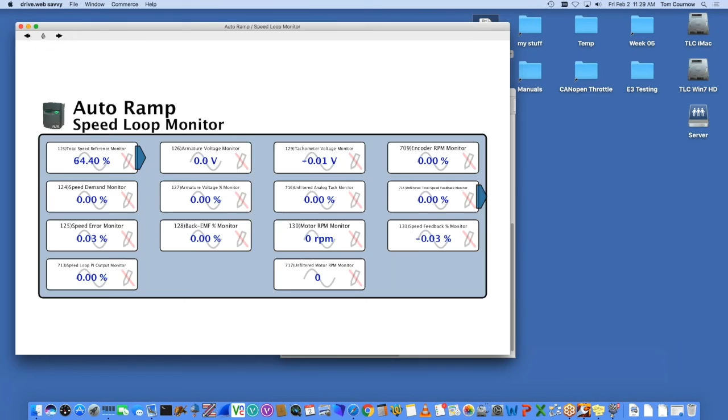So we'll go back to the device directory and look at a couple more things in here. Now, if I wanted to make a backup copy of this entire project, there's a way to back up anything that's in your device directory for editing or just to take with you as a backup copy.

Under the directory menu, there's a command called export data. What pops up when you select that is anything that's in your device directory. You see we got our 6 devices, and they're all checked to be exported by default. So I'm just going to put them onto my desktop here.

I'll just call this my first system, and I'll export all 6 of these real quickly to my desktop. Now you see this file that I created right here. That's actually the file I just created, an XML file that has all the programming and all those devices that you would need to replicate them if you had to replace some hardware.

Now it's also something that can be used to edit your project in the hotel room or in your office. Once you've got that file in hand, from either Phantoms or from the hardware itself, there's a command under the directory menu that we can import. I've got to turn off automatic setup so that it doesn't pop in unintended.

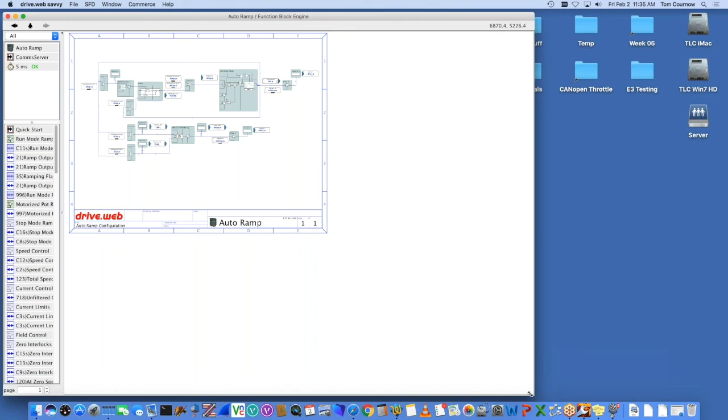Okay, good. So what I'm going to do now is dive inside one of these devices. Let's go inside this drive by clicking on it, and talk a little bit about SFD now.

Now the SFD program - when you aren't using SFD, you'll see this kind of presentation of the DC drive. It's got every parameter in the drive. This is for if your customer doesn't need design capabilities and just wants to monitor his drive - the free software will do everything he needs to support his hardware.

The SFD upgrade is designed for integrators and people who may want to modify their system. It provides a graphical interface to the design that you can use to generate a set of prints for your actual program, as well as to diagnose the program by following the block diagram live while you're online with the module.

Now, if you have the SFD option, when you put this into your drive, let me show you something like this DC drive we're looking at. If we go back to the home page and just look at the Speedies, let's look at one piece of hardware.

So in this DC drive, there's a Speedy just like you see down here. I'm going to lasso it out. This is the board that gets added to the DC drive to make it drive web ready - it's called the DW221 Speedy. Now that board, once it's fitted - let me erase that and we'll go back to pointer mode.

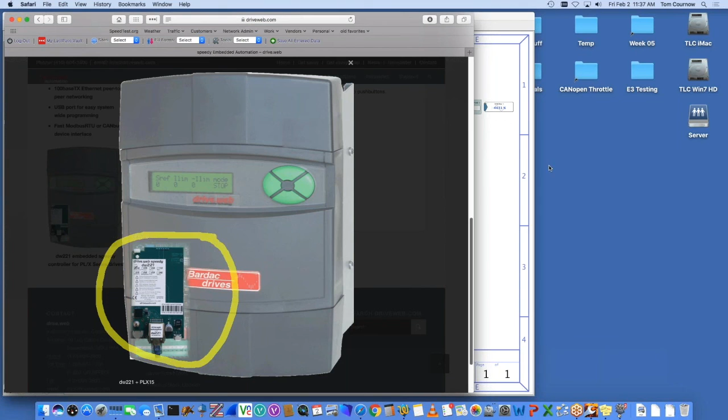Once you've fit the DriveWeb board into the drive, see this little divider I'm moving on the left-hand side? Everything below this divider is built into the drive firmware. You don't need to worry about that - if you bought the drive, it's in there.

Now, when you put the Speedy into the drive, it adds a new library of function blocks that you can add to the drive's block diagram. So it allows you to customize, even in a drive, what the solution is for what you're trying to accomplish.

Now, if you go into the Smarty or the Speedy hardware, those are completely configurable. So this library of function blocks that you'll see pop up when you're trying to place objects later - all those function blocks are based on what you purchase as far as the software goes.

So when you go to our catalog and figure out what you want to do, hopefully it'll be straightforward, but with our help if need be, you can actually get all kinds of different things to solve pretty much any kind of solution, any kind of problem in the industrial world.

Sorry, I've got to get a drink of water. I've been talking too much.

So this little divider is important in that it tells you where the blocks reside. It's not really important in the big scheme of things, other than that if you were to pull that board out - if you stay native to the drive, everything would be below that line. Anything that you put into the board will be above this line. And that board actually has this drawing stored in it.

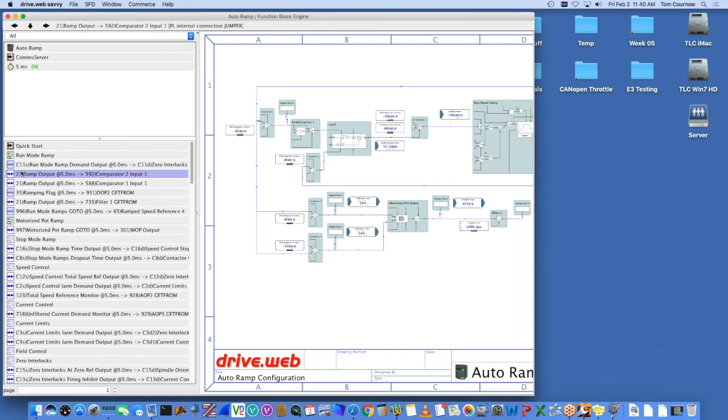You see some of them have white backgrounds and some have blue backgrounds. If they have white backgrounds, they're already in your drawing. So you see this ramp output - let me drag it over so you can see the whole connection. So the ramp output to comparator 2, that's associated with this on the left-hand side. That's coming back - this line here that we see has input 1.

If we right-click and remove from graphic that connection, you see it goes to a blue background. When I drag it back in, it's actually brought back into the drawing, and now it goes back to the white background. Same for the function blocks.

The function blocks that have a light blue background, like the stop mode ramp, are not in the drawing, and when you take them back out, they'll go back to the light blue background. So anything that has a dark green tinge to it is in your drawing.

Now in the DC drive, there are blocks that can be turned off, and they have this red X on them. So if you were to bring in this summer block, if you see it's red like that, it means it's not activated. Now you can drag things in the DC world to hook something up to them - there's nothing hooked up to this one. So what I'll do is drag it in, and when I connect it up to something, it activates the block.

It's sort of peculiar to the DC drive, but that's a legacy thing because this feature existed before DriveWeb was actually made. The drive's about 17 years old now, as far as the vintage of the drive. If we delete that connection, it deactivates the block, and when we remove it, it's back out of our drawing.

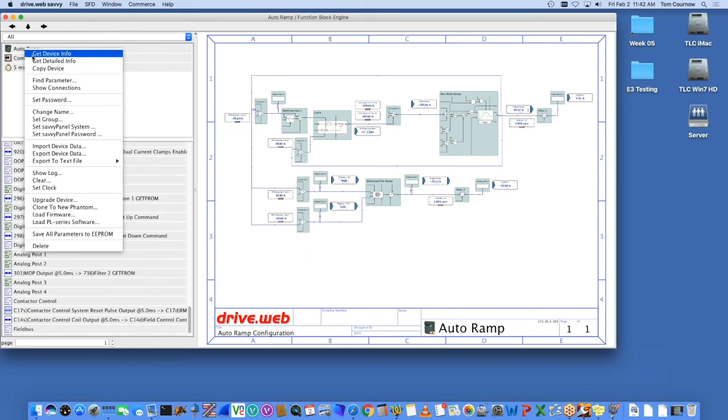These capabilities that you see here, mainly on this window that pops up, are the process control library. I'll put that down here so it'll be in the background. These blocks you see here are included in the option 5 for the DriveWeb hardware, including arithmetic type devices, clamps, comparators, control function blocks, and all kinds of things you can browse at your leisure.

If you go under the add function block, you'll get a browser that shows you options. Let's look at the control block - say we want a PID. There's a block diagram for the PID. When you drop these blocks in, you'll have the block diagram in your library. If I hit OK now, there's my PID function block.

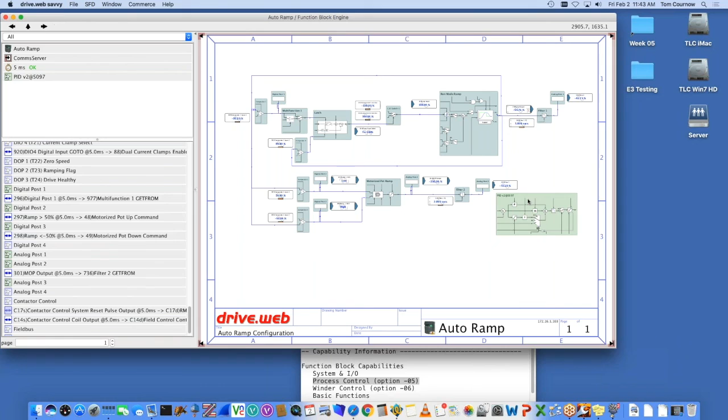Now you notice that went up to the top part on the left-hand side, which means it's on the board. As a user, you don't really care because you're just going to draw lines to connect things. So say I wanted this analog post connected to here, you just draw a line. But in the big scheme of things, the architecture is a little different in the background, so the slight difference in color just tells you where the platform is, sort of like the break over on the side here.

Delete the connection and delete the function block, and you see it goes out of the list. So you can play with those filters any way you like - you can only show function blocks, you can show unplaced but active, you can do all these different things depending on what you're looking for.

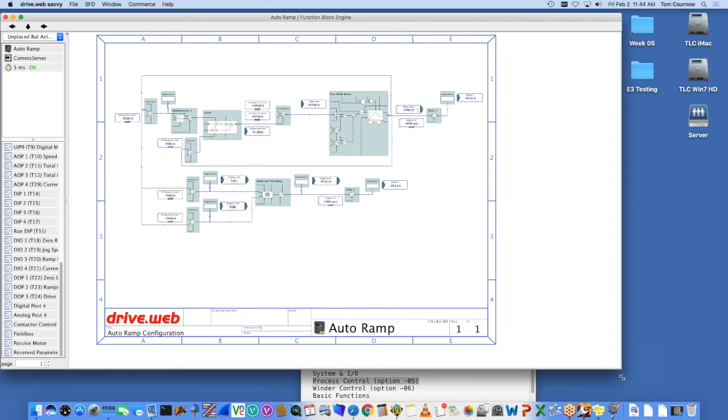I'm going to hit the home key back for the home view - again, the H key for home. You use it in the drawing page as well as anywhere else.

Now the drawing page that you create, you have a choice under the SFD menu to set the border to different sizes. So say I wanted 11 by 17, I can go under set border and say make it ANSI B landscape, which is a standard size. Then I hit the home key, and now that's the aspect ratio if I have a printer that'll do 11 by 17 prints. You also have some European standards - the ISO, international standards - for the A4 and A3 levels, as well as some custom forms based on different contributions along the way.

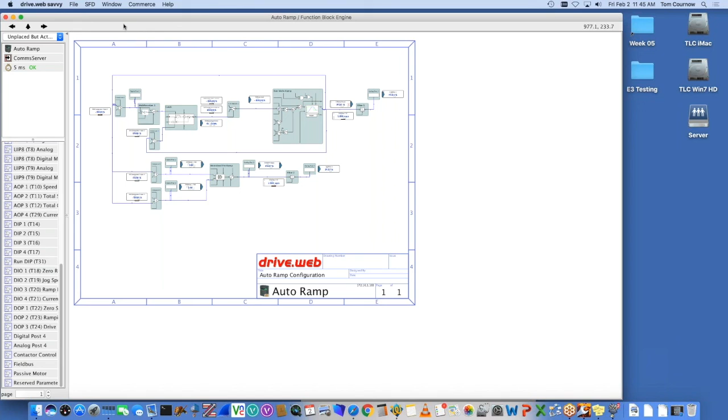I generally like these ones with the alternative title box because it gives you the most area to work with. If you go back to some of the earlier ones and choose them, you see the page, you get a corner of the page, and it doesn't make it as easy to lay your blocks out and do the drawing. So I've changed over to the default as my ANSI A landscape mode.

Hit the home key again. So these zones you see here around the perimeter, like 1 through 4 and A through E, are ways to locate where the blocks are when you start doing multi-page kind of things and breaks in your connections. Now when you pick up a function block or place one, let's just place a new one - we'll put in a PID block.

So I'm going to go into the control menu and put in a PID. There's ways to - I'm going to zoom out from the title form. There's a lasso command, you see how this is all yellow, and when I let go of that, that selects everything that was inside my window. These can be moved as a group.

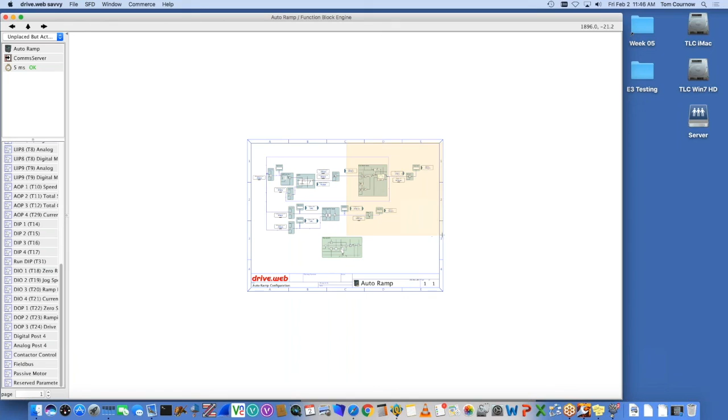Or you can do a subset of that - if you only wanted to do a part of it, you can move only some of them. Now what I'm going to do is if we go back to the home view, while these are selected, you can see the corners, there's a little sepia tone square around the whole edges. And if I hover over this arrow in the upper right hand corner, I can actually increment by a page and drop these things all on a second page.

Let me bring out some things here to show you how the forms work. So if I zoom in here, it broke the connections, but it points back to where those connections go to - page 1, zone A2. I could go to page 1 and go to zone A2, so that's a connection right there, here's A2 down here. But I can also use these as navigation paths, so if I want to go back to the other end of this connection, I just click on it and it pops back to the other page.

Okay, so you can go navigating around these links. It does all this referencing for you dynamically as you break connections if you choose to. Now I can move this all back as a group to the first page. It'll deallocate the page. I hover over the upper left-hand corner, and you now see it reproduced all the connections back to my drawing.

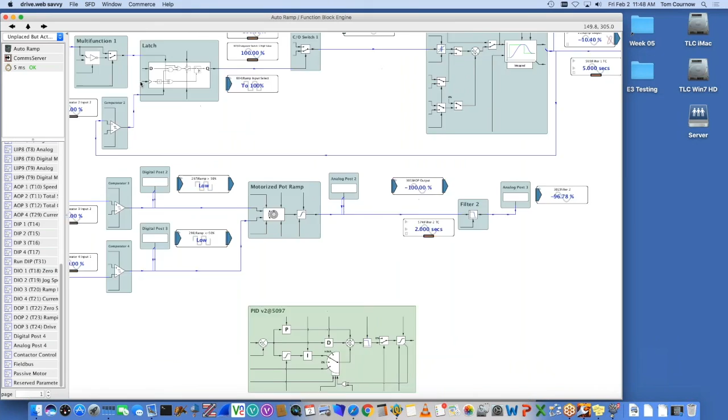Now there's a shift command, or command, I didn't mention when we were at the device directory level. Anywhere you want to zoom, instead of using the plus keys and zooming in and then panning around to where you want to go, there's a couple of different shortcuts to actually zoom in on what you want. If you right click and say start zoom marquee in any white space, that'll start a window that'll let you zoom in to whatever you select, and then the next time you click, it'll zoom into that window.

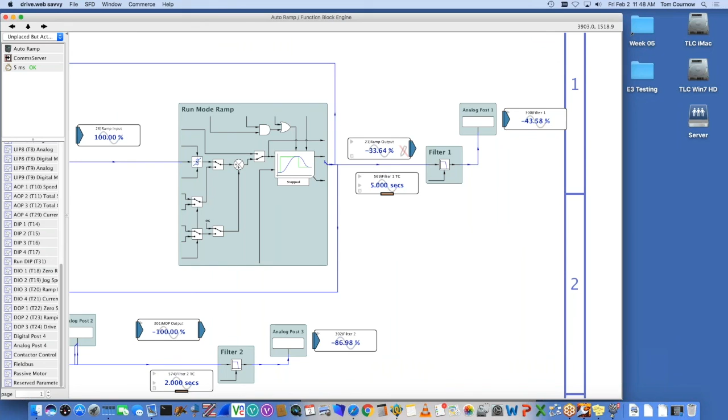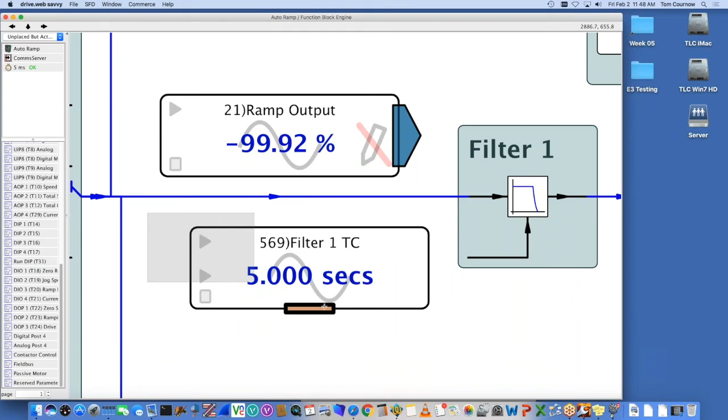Now that works fine for the average Joe, but you want to be a power user. The key is hold the shift key down and just click and drag. Then you can zoom in really quickly exactly where you want to be. I was just holding the shift while I click, and when I let go of my mouse, that's where it zooms to. So shift, click, and drag, I'll try to announce it when I'm using it so it's not magic.

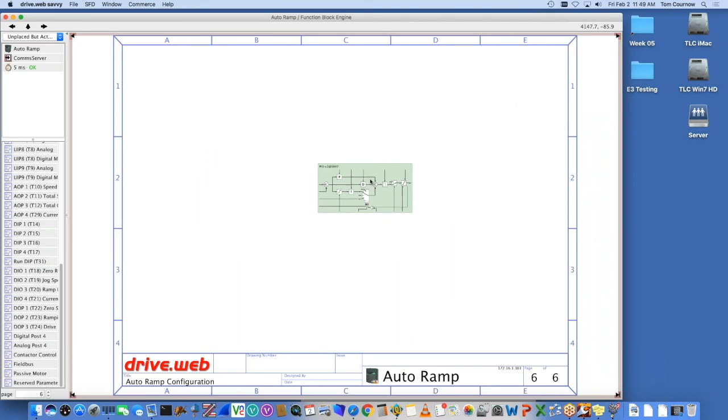Now when you're picking up function blocks, if you go to the lower left-hand corner, it goes to the first page, and when you go to the lower right-hand corner, it goes to the last page. You hover over here about a second, you get a page, and you can see the page incrementing at the bottom. So if I put this on page 6, I've got 6 pages to my drawing now with a bunch of blanks in between. So if I wanted to put these parts on that last page, I go to the lower right-hand corner, it jumps to the last page, and now it's on page 6 with that other block.

There's a lot of pretty sophisticated editing tools built into the software that you can use to make your life easier. I'm going to put everything back on page 1 just by hovering. Now it remakes the connection. And once I drop them, I'll move this other block out of the way.

Okay, any questions, Stuart?

Okay, so let's look at how we make a connection. Now there's a ton of function blocks. It's going to take a little bit of time to figure out which blocks do what. There's a help manual that's built into the software that you can browse at any time.

If you go under the user manual, that'll build a manual, and then from your software you can go browsing into different topics if you choose, or if you want to find out about the run mode ramps, if I do get function block info, up pops the information about this block. And if I do show user manual page, it'll actually jump to the info window that shows how the run mode ramps works.

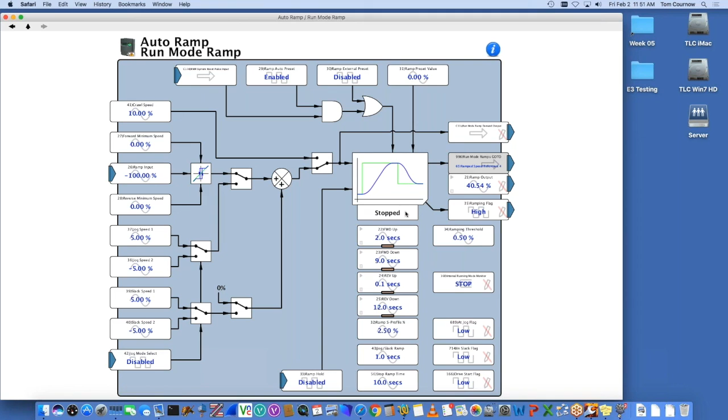So let's look at how you make a connection between any blocks you decide to put into your program. I'm going to create another viewer window so you can see. This window is going to be inside my drive. Okay, so I'm going to create a new viewer.

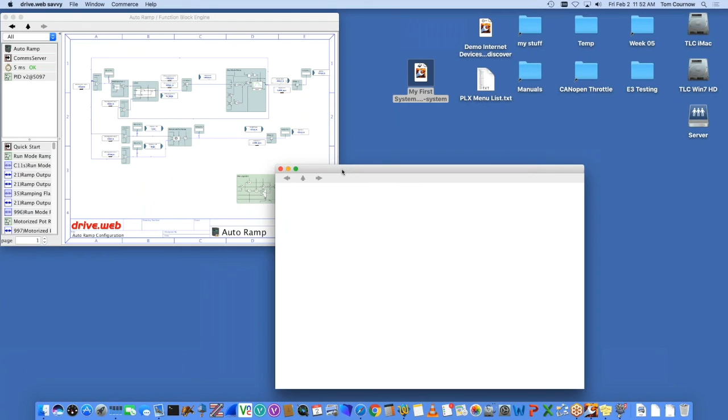Right now it doesn't know what type of window I want, it just created a window. So under the file menu, I can open another device directory, which will be just like the one we go up a level, the same device directory as you see here. But I'm going to stay in the DC drive in this one. I'm just going to change the name of this guy real quick to Tom's smarty. And then we're going to dive into that one on this page, which is an empty Smarty module.

I'm going to drop one function block in there to give me something to hook up to. We'll see all the different ways to make connections. I'll zoom in with shift, click, and drag. So there's a parameter—it's just a little place to make connections to, really, but it's used for a lot of other purposes along the way. Let's see how you make connections.

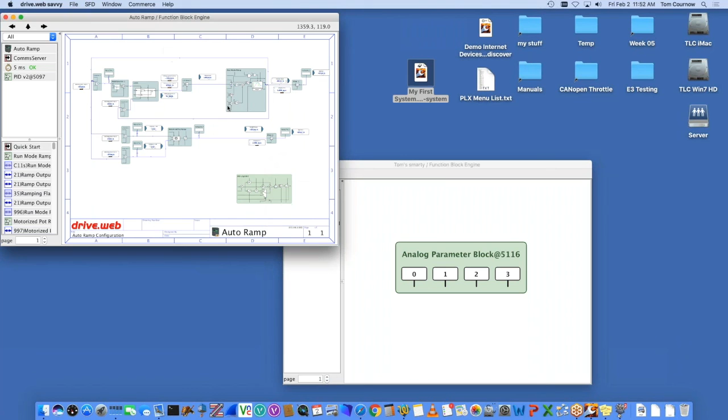The easiest connections are in the same module. I'm going to delete this connection here and zoom in. To make a connection, you see how the little circle pops up? I'll move this over so I can get it all at an extreme level. You see when that little circle appears, that means at the SFD level I can get to the parameter I want to connect to, and I can just drag by clicking. You'll see a dotted blue line, and when you get to where you can make a connection, you see sort of a reverse Pac-Man looking thing. You let go, and that makes the connection for you. That's how simple it is to make connections.

That's the drag and drop method. Now you can do that locally, or you can do it across the network. This one's just a connection from a changeover switch to the ramp input. Say I want to connect this to my Smarty that's over in the other module. Let's see if this is the one that has my analog input in it—it's terminal 16. Yeah, that's got my potentiometer here. So this is my Smarty you see here, okay?

Say I wanted to take this away and connect this analog pot to my DC drive over here. All I've got to do—let's zoom in so you can see what's going on over here. This is a connection across the network using drag and drop. You start a connection on my potentiometer, drag it over to there, okay? Let me bring them out to the top level so you can see them. So there's the ramp input. When I change my pot on my Smarty, it's going across the network from the Smarty over to the drive for its speed reference. That's all there is to it, drag and drop between the two points.

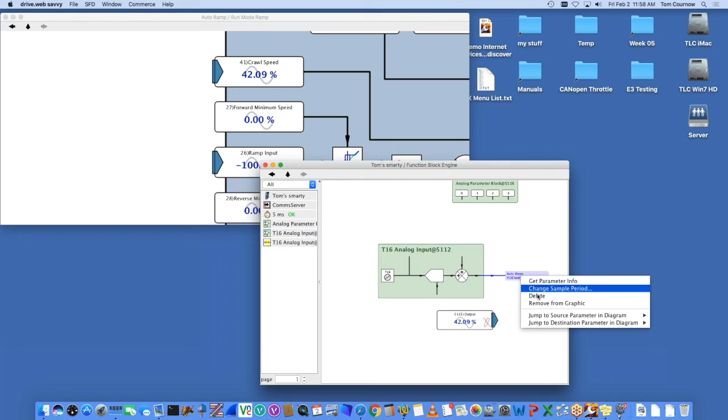It's all up to you which method you use. A lot of people don't like to have a lot of windows open, so they'll choose one versus the other depending on what you're doing. So that's connections, how to make connections either across the network or locally. You just drag and drop between your points and the connections will be present.

Now, before I get into some of the details of configuration, we're about an hour in, so I need to get moving here. We'll just talk about parameters for a second. So all these blue things you see in this program are all parameters. They can be manipulated directly if they don't have an incoming connection, but with this setter, you can change values if you want. You can set them back to the factory defaults.

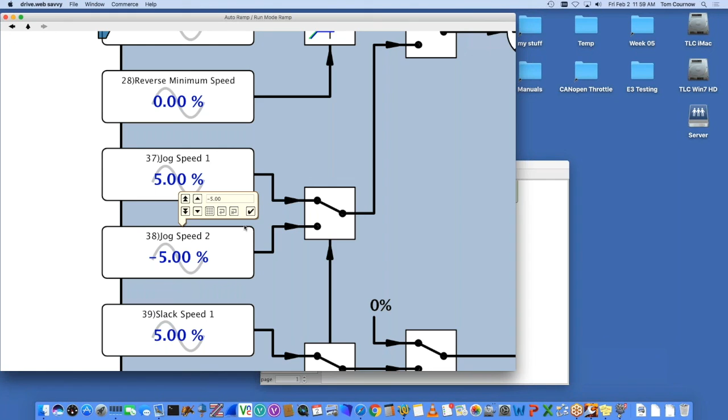Whenever you change a parameter, this little blue or brown bar will show up under a non-default value. It's used for our reporting features as well as a nice visual indicator that somebody's changed that parameter, and you can see them from a distance pretty easily. There's 4 parameters in this function block that have been modified along the way, and it looks like I changed these probably last time I was playing around with them. So they're at some value. I'm going to put these back all at 5 because I didn't reload my program before, and we'll change them later.

So as we look over here to the right-hand side for the ramp output, this is actually a parameter that's changing in my DC drive continuously based on the program I built. It's just a little program that ramps it up and down from full speed positive to full speed negative continuously back and forth, which we'll see why in a few minutes.

Now you see this little AC waveform in the background - that means it's an analog parameter. You see the ramping flag has a square waveform - that's a Boolean parameter. The little pencil with the line through it you see here means they're read-only, which makes sense because the drive's ramp function block takes care of controlling those parameters. So it's a function of the particular module you're in - anything that's read-only is controlled by the hardware.

In this case, all this stuff down in the lower right-hand corner, and pretty much the whole right side, is all set by the drive because this function block resides in the drive. These little blue pentagons are incoming connections. If you go up a level, those are all associated with the blue lines coming into the device or going out of the device. So when you go in, you see I've got the ramp input shown in my drawing. Now there is a connection down here, but...

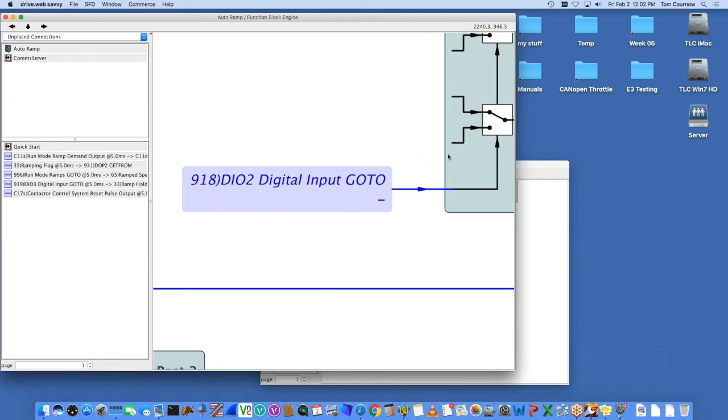If we go to unplaced connections, these are things that are not placed into the drawing. So you can find, if you want to go - this is jog mode select. If I put that in, you see it doesn't tell you where it is because it's not on the drawing, but it tells you where it comes from. That's what these blue pentagons are inside here - they're incoming connections, and these are outgoing connections.

And you can navigate, like I said before, directly by just selecting where your path is. I want to go to, say, the filter - there's the ramp output coming into the filter block. Here's the filtered value, just to show you the filter in the DC drive.

So the analogs have an AC waveform, the digitals or Booleans have a binary waveform. The last type is an enumerated, which we see down here. The enumerated is more than the 2 of a Boolean, but not virtually infinite like an analog signal. So this has a certain number of possible states it can be in that tells us the mode of the drive.

Now if you right click on the parameter and say get parameter info, up pops the parameter info window. So this tells you what the possible states are.

So it depends when you're running a drive in real life. If you were reading parameter 168 on some third-party hardware, the number coming back to you would tell you what mode you're in. So if I see a 6, I'm in slack speed. Now this text is used throughout DriveWeb, but when you get into interfacing, you may need to know all those details.

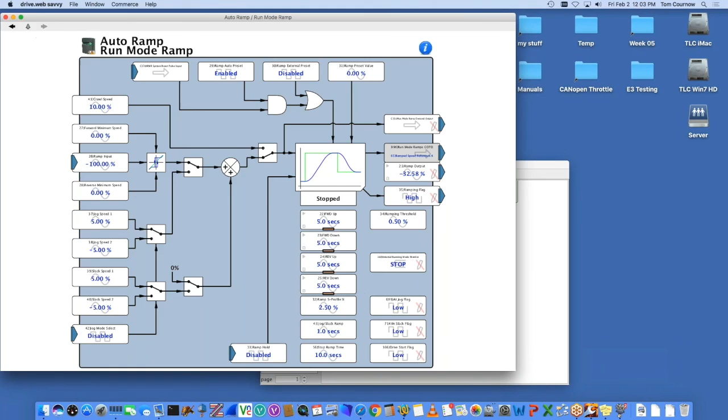So let's go into a commissioning phase here now. We're going to look at how you build screens to look at parameters, then go through the whole process in the last 15 minutes or so. Once you've got your design done, whether it's a standalone device like this drive or a network group as you see in the device directory here, there are some commissioning features we built into the software called docs.

I'm just going to close this window, and we'll go into the file menu and say create a new viewer. Now this window doesn't know what type of window it is, but if I drag a parameter into it, it automatically becomes a doc. You see how it says it's a doc, and I'm monitoring that parameter in that window. Now I can put other things in there by dragging, or I can just right click on parameters. Let's do this one, and since there's a doc open, it just plops it into that doc.

Okay, so we've got the ramp input, we've got the two filters. Let's put this one in there, and then we've got one more here. So here's our five parameters we want to monitor.

Now I can look at the digital values like you see here. I'm going to make it much bigger so you can see what's going on. Let me get them lined up here. Okay, so here's our parameters we're actually monitoring.

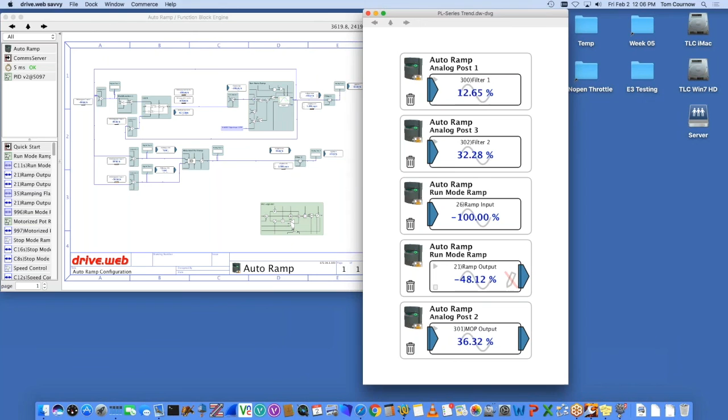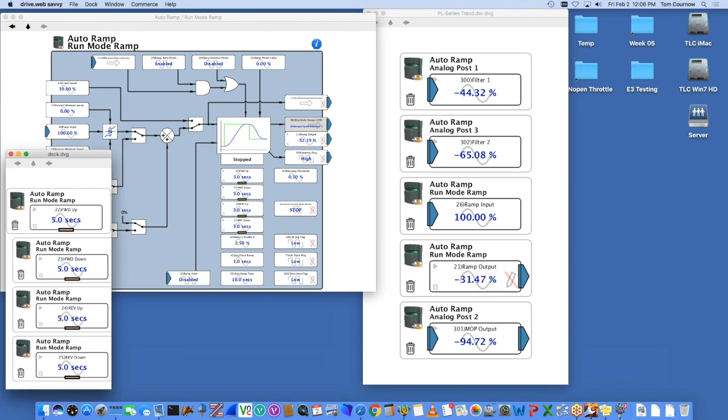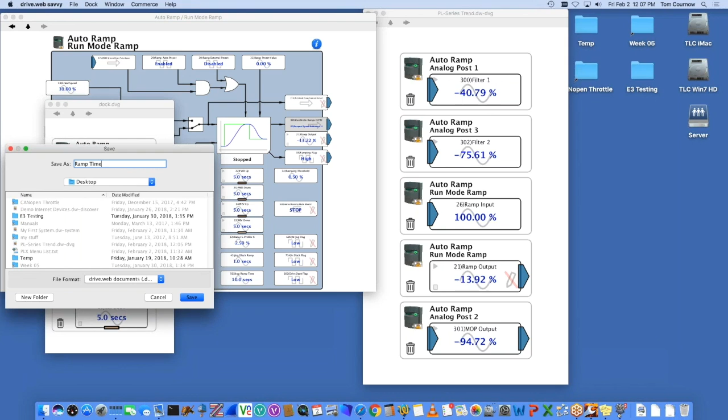If I closed it right now, I'd lose that information because I hadn't saved it yet. It'll squawk at you. But what I'm going to do is save it, and save this one on my desktop and call it my ramp times. So I can close this window back here. Here are my ramp times. We'll just put that in here.

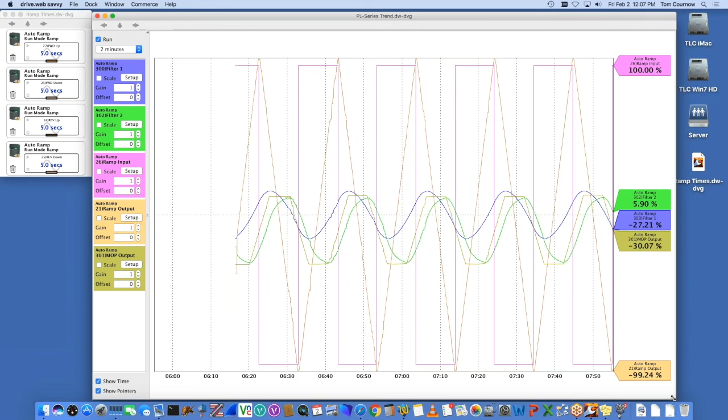And so on this window over here, I can say under the dock menu, show trend. And we actually have over time - let me hit the home key to zoom in at a bigger level. Let me just get as much space as I can, I've got to minimize my little GoToMeeting thing over here. So now that's the trend over time of my parameters that I'm looking at in my drive on my desk.

You can see they change colors based on what's selected, in the order in which I placed them. Now we have controls over here where I can say I want to just see when the value changes. I can reduce the gain on the pink waveform so that when it goes plus or minus 100%, I can move that up here. Then the output waveform, the ramp output, I can make that much smaller. And if we superimpose that by moving it over, you can see it's related to when that other one switches.

It's sort of showing you the design I've got here. And then if we separate these other ones here, these are the filtered - that's the MOP output being clamped, with the top being squared off as you see there. And then the other two are just different filter values depending on what you're looking at.

Okay, they're filtered. You can see the lag that it put into the ramp output based on the filters.

Now I can pause this dock if I uncheck the run command. And now all those navigation features, the shift, click, and drag, I can zoom into and see exactly what was happening at this point in time.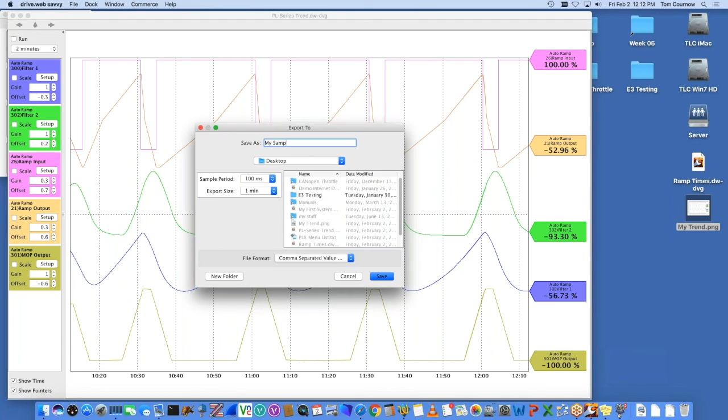I'm going to use a sample because it's a little quicker. Call it my sampled data, and say save.

So now this particular CSV file I can import to another program. After my Excel stops bouncing, we'll see the data actually as it got accumulated every 100 milliseconds. Now the reason it's time-based is because sometimes your spreadsheets and the like, if you give them too much data, they'll just never come back from trying to launch them.

Just want to show you that you can actually look at this data. I'll just make it fit the columns, and then if I go under the chart command and say reproduce the lines, you got my chart.

Now you don't have the controls we have in Savvy for scaling, but you see the raw data is reproduced back into something that I can use and print out or do any analysis on in Excel or whatever program I have that can handle CSV files.

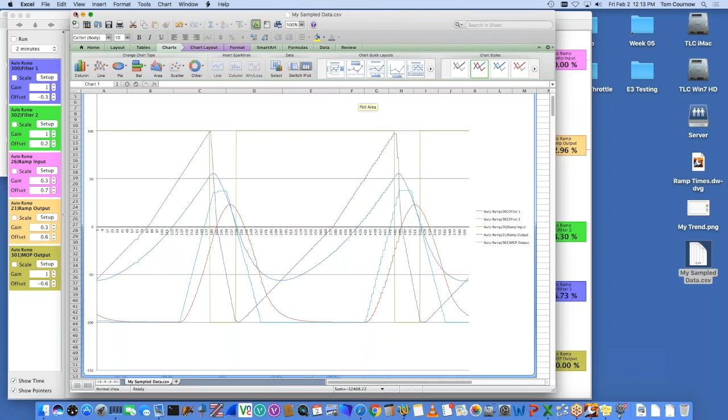Okay. Now we're about 15 minutes out from completing the session. Let me just save this to my desktop.

I don't know where it went, it must have saved it back as a CSV file. But what I wanted to do now is try to tie it all together by doing a quick design

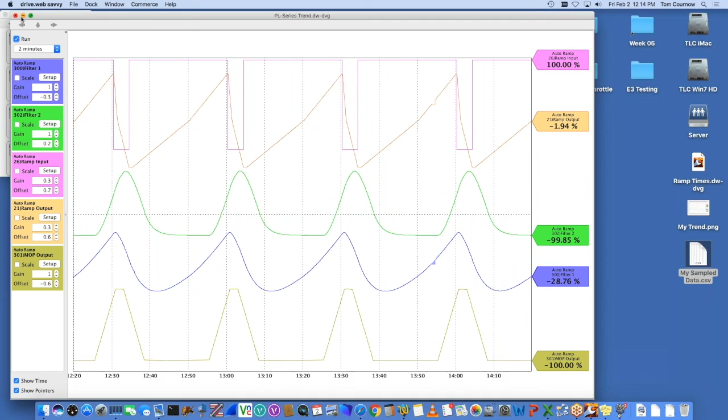and troubleshooting of an entire Smarty. We'll just open up a blank Smarty and go through the whole process. Now I'm going to close this, not worry about saving the changes. Let's open the device directory, and we're going to use Tom's Smarty that you see here.

Now remember this address, it's 1.104. It's 172.16.1.104. Okay, so I'm going to go in like the average guy.

Don't worry about saving that. And I'm going to work offline, being prepared to load it into a Smarty. Say I'm in the middle of the night and I got to replace an old analog rack that did a PID function to get this machine back up and running. Got the Smarty in my toolkit, and I've got enough I/O to do what I need to do to replace that $30,000 rack that is obsolete now and has an 8-week delivery time.

So let's just go from the starting point where, okay, now where do I start? First, I've got to create a phantom of a Smarty that I can use. I'm in the cafeteria drinking coffee while I build this thing before I go out and install it. So I'm going to go under the directory menu and I'm going to create a phantom device.

This is the way phantom devices are - those sepia-toned devices that allow you to do your design work separate from the hardware. So I'm going to create my phantom device, and it walks you through different menus. Now it's a drive web controller, which I know is my Smarty. It's a DW210, just because I've gotten familiar with the product.

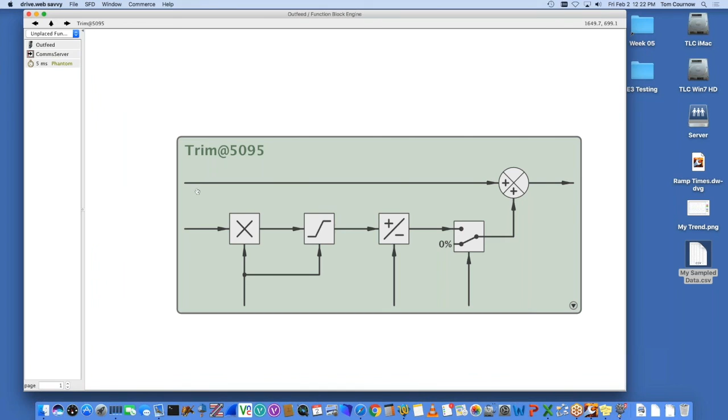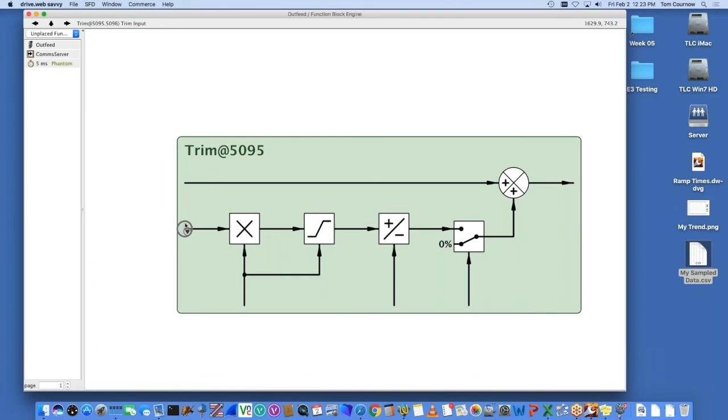And what you see is what you get here. So if you look at that block, I've got the line speed that'll pass straight through, and the summing junction, which I can enable and disable, will allow me to bring another signal in that I'm going to bring in from my PID. So I'm going to hit the home key.

And let's just use a drag and drop connection locally, okay? And we'll connect this one up to here. So right now, with what you see there, I would get my signal over to my outfeed drive section from line speed directly, except I put it in the wrong input.

Should have left that for our own posterity - I meant to put it there. I'll make some mistakes along the way just so we can troubleshoot with our features once we load it in.

And let's put in our PID. Okay, so here's our PID function block. Now we're going to put this into the feedback for the dancer.

Okay, now if you dive in here, it's just what you see - here's the feedback right there, the dancer feedback. The set point's going to be a fixed value, but instead of diving in here and setting it every time, that's something I want at the top level.

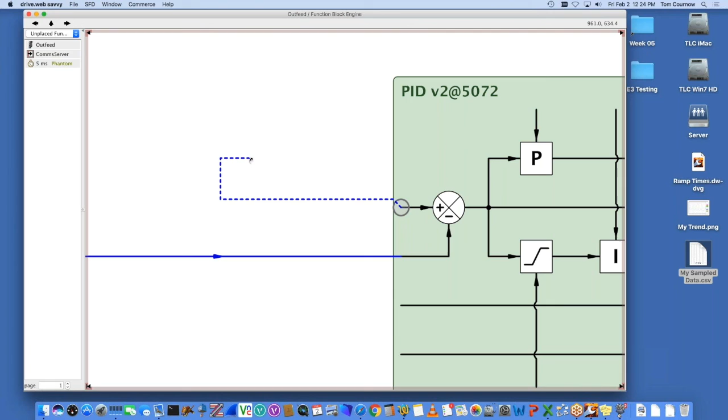So if I shift, click, and drag so I can zoom in - whenever you want to see something at the top level, you pretend you're making a connection, then you hold down the control key and let go of your mouse, and it brings it out to the top level.

Excuse me one second.

Sorry, my throat's getting a little dry.

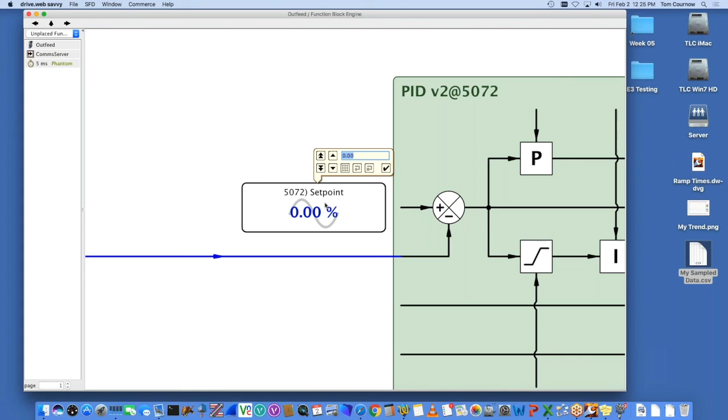So there's our set point. We're going to put that at the 50% position so that the dancer rides in the middle. Back to the home view. Now, this will be our dancer, and this is the set point that we're comparing it to. Then all we got to do is hook our PID block up to here. That'll give us our trim to keep the dancer in the middle based on the speed of the outfeed, to pull it up or let it go down depending on which way you want it to go.

Now, if you hover over any of these lines, it tells me what that is. That's the PID integral enable. This particular one's the integral hold. This one over here is a PID enable, so that's the one I want to take my tension enable into, the PID enable. Okay?

That's sort of the basics. Let's load this in and see if we can get anything working. I'm going to do a couple of things to make our trending a little easier.

I'm going to put a little indicator block in here under the utility command. That'll tell me when the PID is on. This will go green when that switch is on. Okay, now that looks pretty good as a starting point. I'll bring some other things out to the top level by pretending I'm bringing them out to this level. Okay.

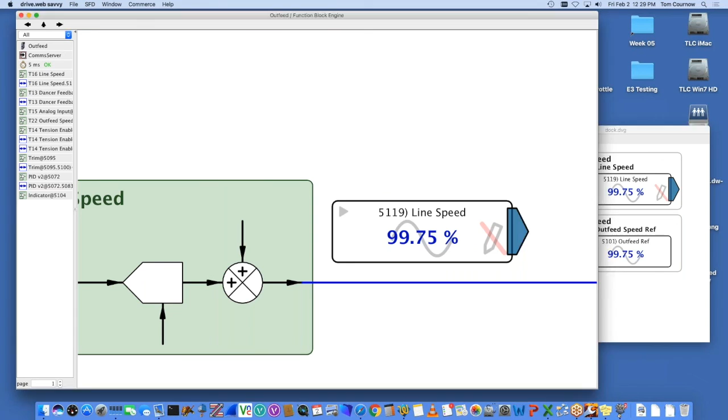So we're going to rename that line speed. Okay, and so if we look at this trend over here, okay, there's our line speed. And we can see if I change speed up and down, let me take the green up because that's line speed. You can see it follows 1 to 1, right?

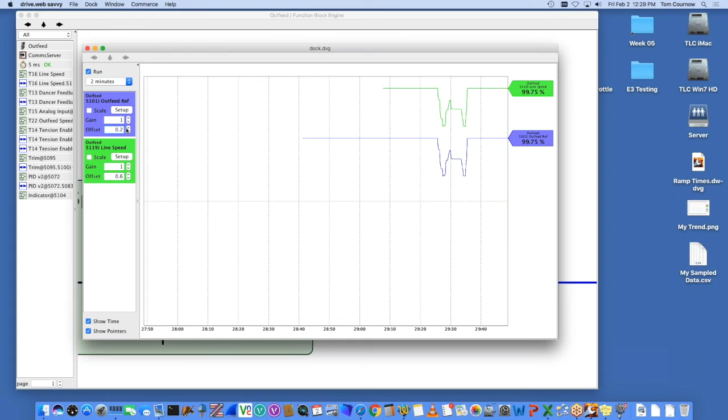So we're halfway home now. Let's make this, move it up a little bit. We'll just move this one up too. We need a little room for some of this other stuff. So now we got the line speed part figured out.

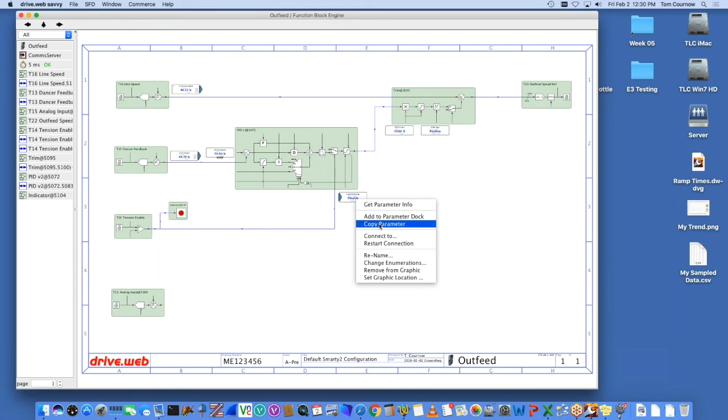So let's see, let's take the tension enable signal. We'll use this one over here, which is PID enable, and we'll just add that to the Parameter Dock. Okay, now I'm going to move, so this is our PID enable. I forgot what input that was on, terminal 14. When I move that value up and down, it's not enabling. I'm moving it, but you can't really see that I'm moving it, but it's not changing state. So let's dive into that function block.

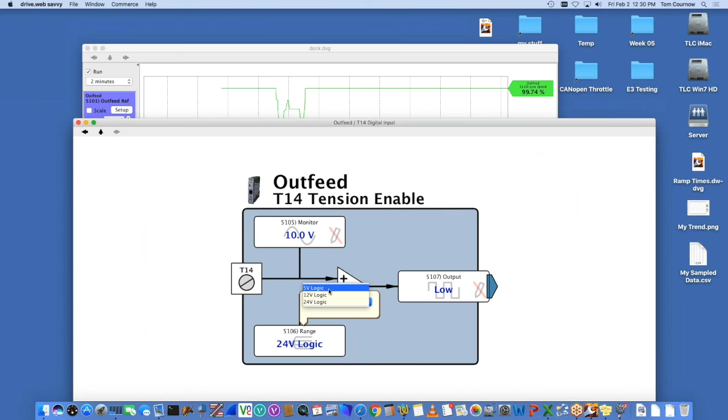Well, then my voltage is changing, but look, I made a mistake. It's not 24 volts since it's a potentiometer. I've got to be 5 volts because it goes only from 0 to 10 volts. Now if we look back here, oh look, now my PID enable works. Okay.

Now that's a Boolean, so let's make that a little runt here so we can just see when the PID turns on. We can leave it at the 0 mark, that's probably fine.

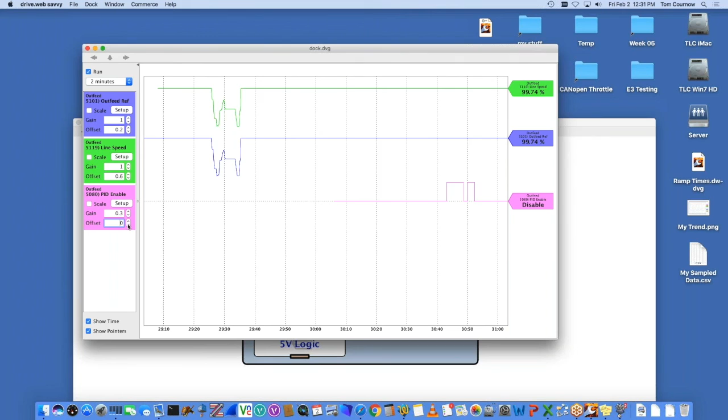All right, we sorted that out. Now my little indicator should turn on when I get it on and off. See down here, my green indicator when it's enabled and when it's not enabled. Let me zoom in so maybe you can see.

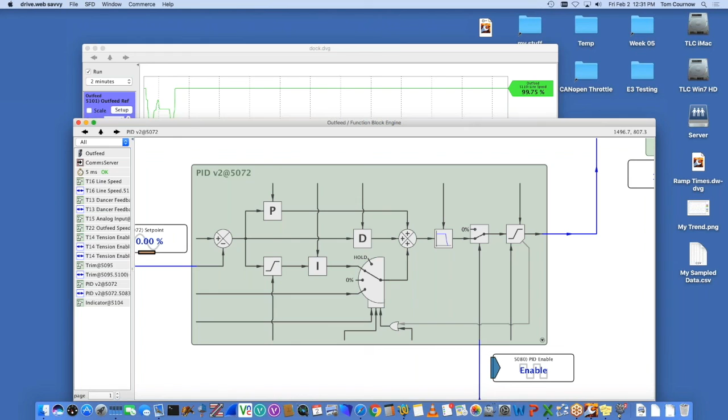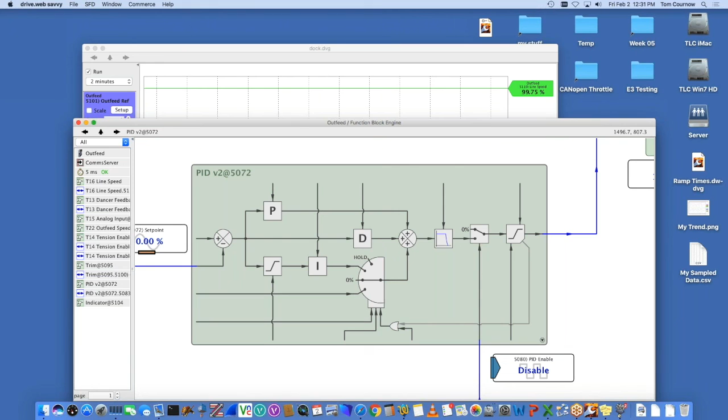When it gets enabled and disabled, you see that it's animated at the SFD level, what's going on. It throws the switch to say the PID is going out to the output. And you see that it comes out of the 0 value for the integrator and goes back to integrating. If you dive in, you'll see the same animations, you see how your block is working, okay?

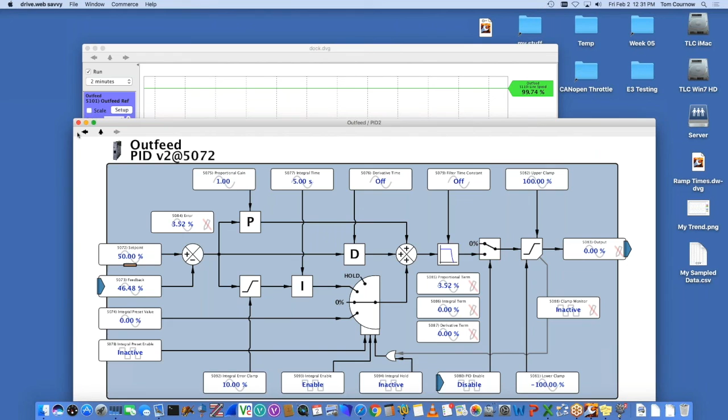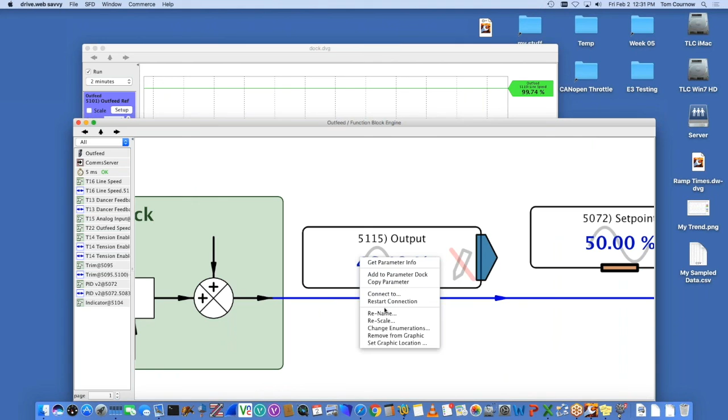So let's see, we've got our... let's rename this parameter. This is going to be dancer position instead of output. We'll just call this dancer position, okay? We can just put an apostrophe in there to abbreviate it.

And so we want to put that to the dock. Let's put that into the dock so we can see where the dancer's going. Okay, so if we look at it now, there's a dancer position. Let's put one other thing in there.

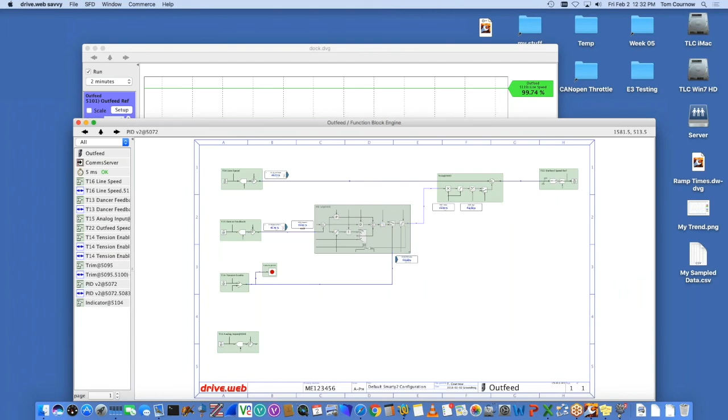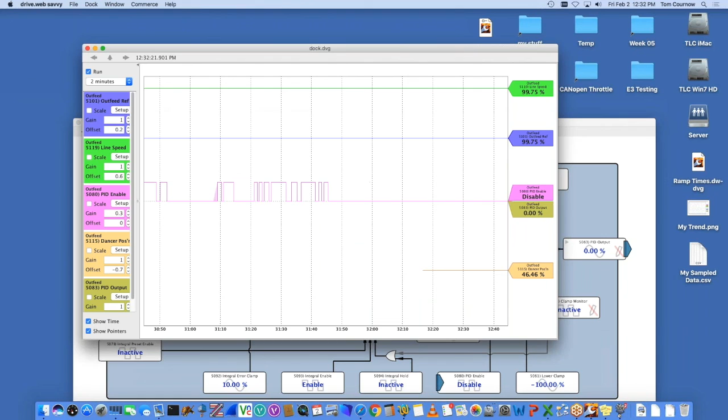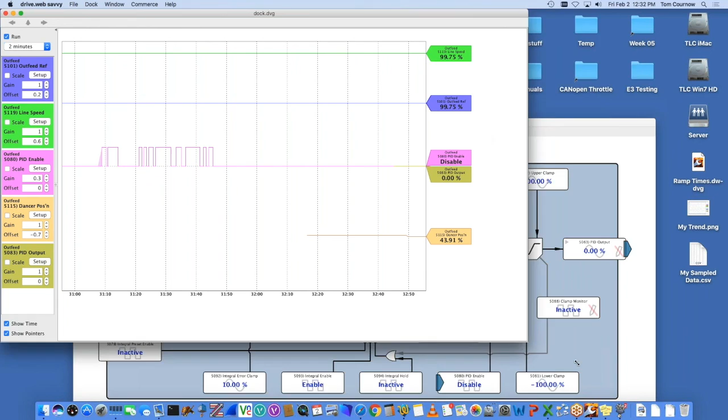Let's put the PID output. So now we've got PID output. So we would expect when this thing is enabled... let's go down with the, make this a little bigger. Okay, and let's take the PID output down

and take the dancer position up. Now here's our dancer position value, that's the range it's going to value. Okay, I can give it a little bit more. I'll just change the gain a little bit so we can see what's going on there.

So let's put it in the middle position, and let's turn our PID on. Okay, I see it's slowly integrating up to the full output because my position is off a little bit from 50%. Let me go towards 50 and let it settle out.

So my dancer is almost equal to my set point. The integrator will make it climb slowly. But look, I'm not seeing - if I change the line speed, it doesn't do anything. It's not changing speed, it's exactly at line speed. So I've forgotten to do something back here in my drawing.

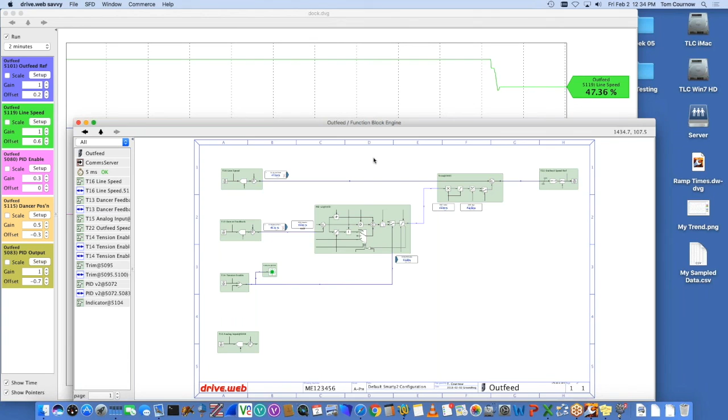So let's see what's wrong. Now I've got my enable signal, it goes here. Now if we look over here real closely, there's a switch on this that's not getting thrown. Okay, oh, so well, you know what, I just want to take this over to here to get that switch thrown.

Now let's see what happens. Now we see, based on our trim signal of 10% with a positive sign, and this thing is integrating, so it's only 25% of 10%, but you see the outfeed speed reference is slowly increasing based on the PID trim. So now if I make it a drastic change, you see it moves quicker.

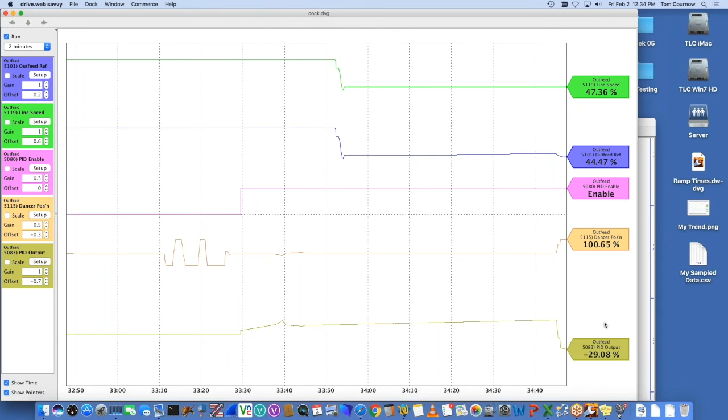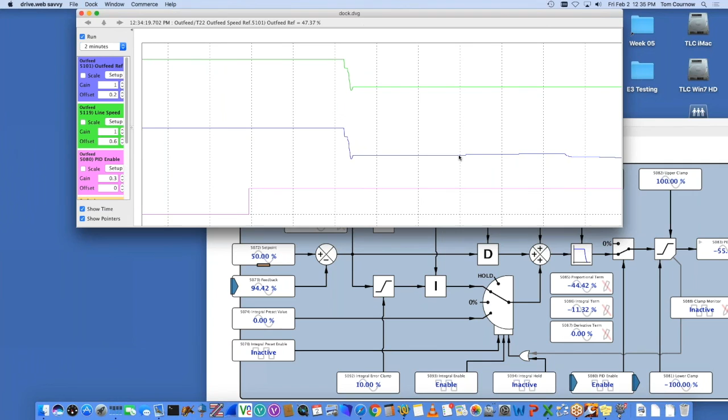And we can do crazy things. Let's just change the gain. This is where you may want another dock. Let's do another dock over here. Now if I just said add the dock, it would put it into this dock because that's the one unnamed one that's open now. If I go on and create a new viewer...

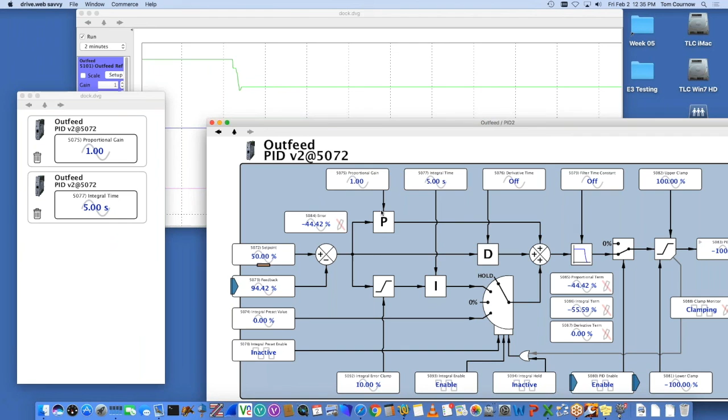let's just put the ones we want over here. So we'll do proportional, integral. Okay, we won't worry about derivative for right now. And we may want to have... let's get the trim range in there too. Maybe even the direction.

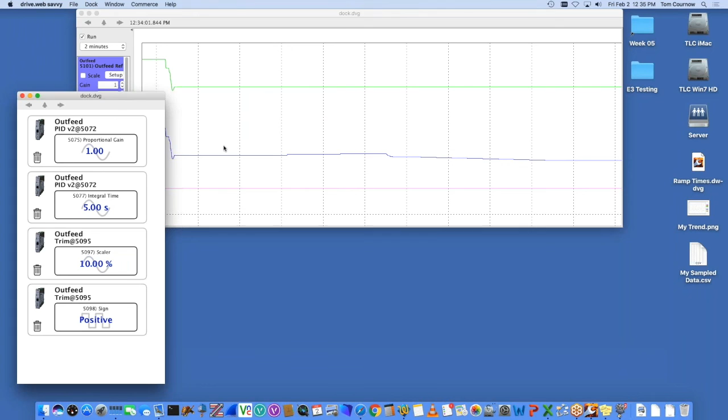So we can close this window now, and let's look at the performance. See, we've already integrated to full, we're at full minus output on the PID. So I'm going to reset the PID by taking my terminal 14 back to 0. You see we came right back to line speed.

Now if we re-enable it, you see we jump pretty quickly because the integrator didn't wind down too much, and now we're integrating back up.

Now let's do this. Let's change our dancer position back to somewhere in the middle. And then we'll re-enable the PID. And you see it's below the set point of 50%, so it's slowly incrementing up.

And let's change the tuning parameter to, I don't know, let's make it 10, see how quickly it changes. Boom, it just changes really quickly. So there's our step change. So now we've got way too much gain in there because our PID is going crazy.